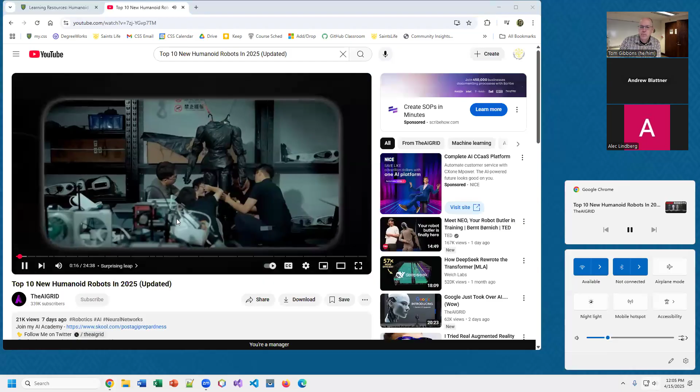Okay, so he's going to go over some robots, and just so you know, what we're going to want you to do eventually is break into pairs. We'll do this today and sign up for a robot. I have a bunch of robots listed here, and I think I have everyone in that video. If I'm missing one, we'll add it to the list. So what we want you to do is pick a robot here and sign up, and again we'll sign you up in pairs when possible. So when you're watching this, think, oh, I want to do a report on that robot. And again, these are only 10, and we have more than 10 on this list, just so you know.

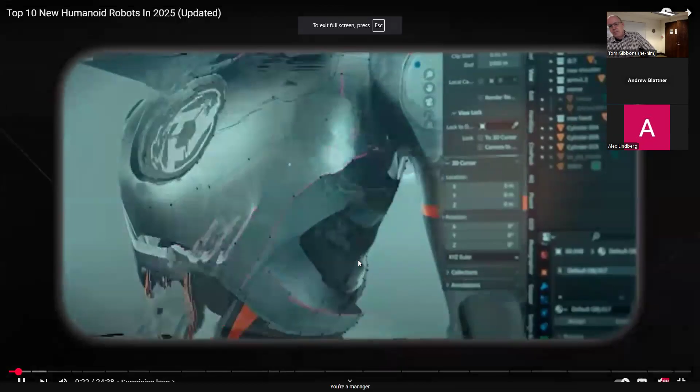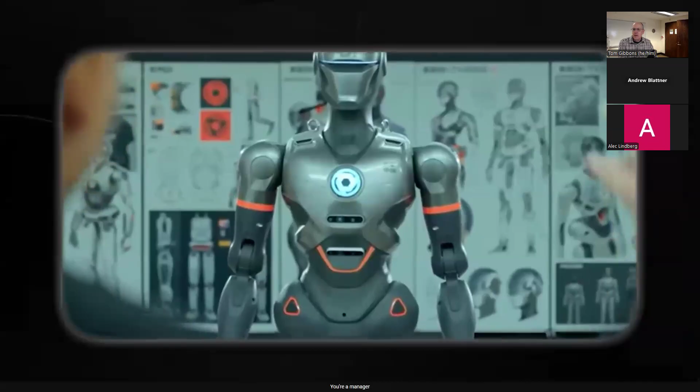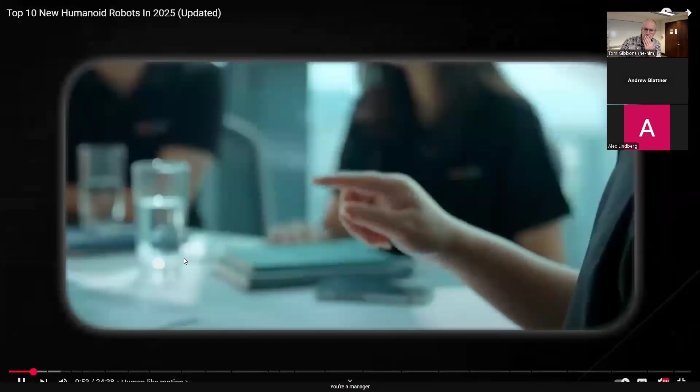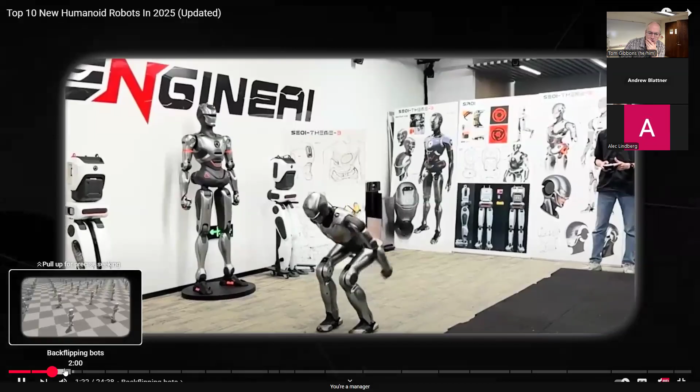2023. The company specializes in developing robots with lifelike movement capabilities, setting a new benchmark for realism and functionality in robotics technology. Among its creations, Engine AI's SE01 humanoid robot stands out for its remarkably human-like gait and advanced motion control, achieved through the use of NVIDIA's Isaac Gym, a virtual environment that enables sophisticated AI training. This platform allows the robot to simulate and refine movements before implementing them in the physical world, resulting in fluid and natural locomotion that closely mimics human behavior. Engine AI's team, composed of 36 researchers from prestigious institutions such as UC, demonstrated impressive feats of agility, including performing front flips, a significant achievement given the difficulty of maintaining balance during such maneuvers. The company offers a diverse product lineup tailored to various applications. The SE01 is designed for industrial use, while the SA01 serves educational purposes, and the PM01 focuses on agile performance. These robots are not only functional, but also open source platforms.

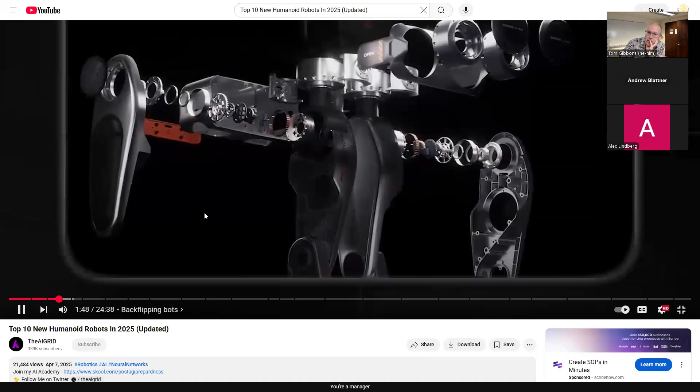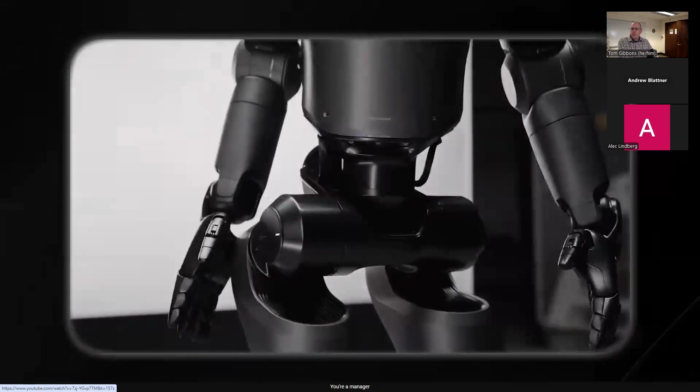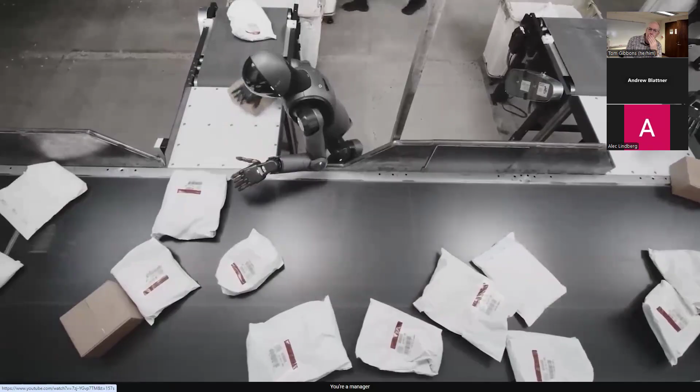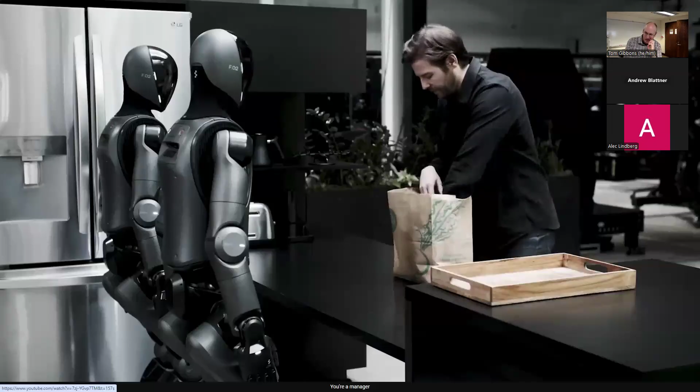Figure robot. Figure 02 is a cutting-edge humanoid robot developed by Figure AI, representing a significant advancement in the field of robotics and artificial intelligence. Standing at 5'6" tall with a payload capacity of 20 kilograms, the Figure 02 is designed to closely mimic human form and function, making it ideal for performing a wide range of tasks in environments built for people. This second-generation humanoid robot boasts impressive features that set it apart from its predecessors and competitors. The Figure 02 is powered by an electric system that allows it to operate for up to 5 hours on a single charge, with a custom battery pack integrated into its torso, providing 50% more energy than its previous iteration. The robot's mobility is enhanced by its ability to move at speeds of up to 1.2 meters per second and navigate complex environments with ease. One of the most striking aspects of the Figure 02 is its advanced AI capability, which enables it to perceive and understand its surroundings, adapt to changing conditions, and even engage in speech-to-speech conversations with humans. The robot's onboard vision language model, powered by 6 RGB cameras, allows for fast, common-sense visual reasoning, while its partnership with OpenAI has led to the development of custom AI models that drive its conversational ability.

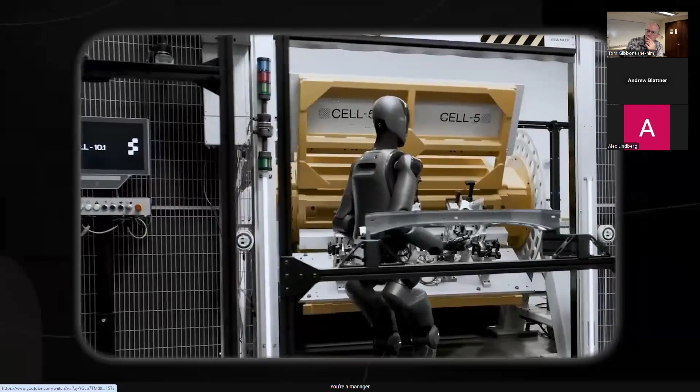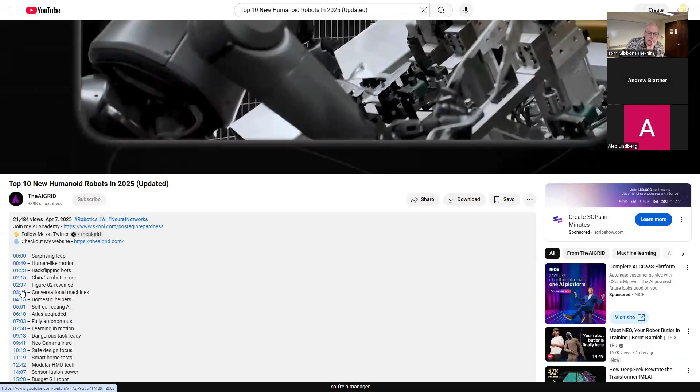The Figure 02's dexterity is another standout feature, with its 4th-generation hands equipped with 16 degrees of freedom per hand, mimicking the strength and agility of human hands. This level of dexterity allows the robot to perform intricate tasks with precision, from manipulating delicate objects to operating tools and machinery. Recent demonstrations of the Figure 02's capabilities have showcased its action.

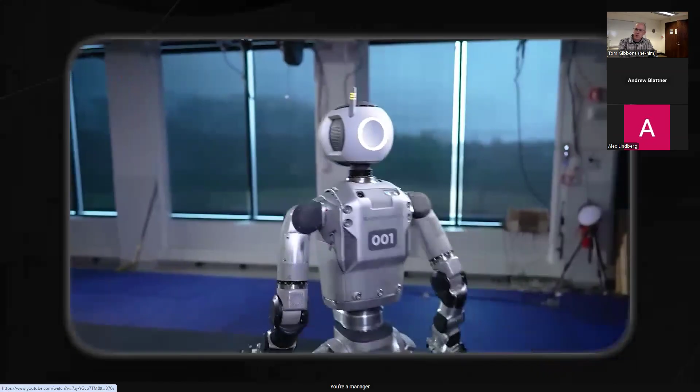Next, let's take a look at the Boston Dynamics Atlas robot. The Boston Dynamics Atlas is a cutting-edge humanoid robot that has become an icon in the robotics industry since its initial unveiling in 2013. Standing at 1.5 meters tall and weighing 89 kilograms, Atlas is designed with an emphasis on advanced mobility, dexterity, and a high strength-to-weight ratio. The robot incorporates titanium and aluminum materials with extensive use of 3D printing technology to optimize its frame for both robustness and relatively low weight.

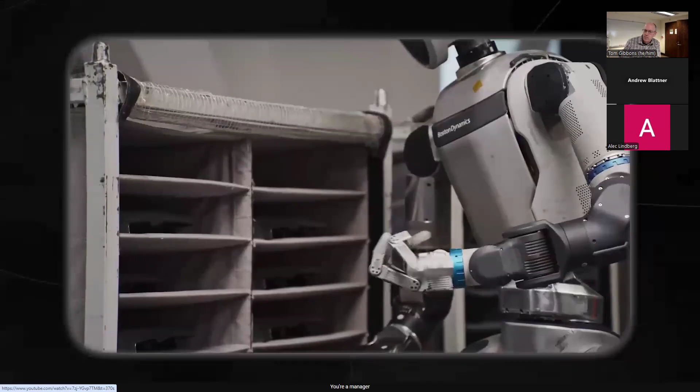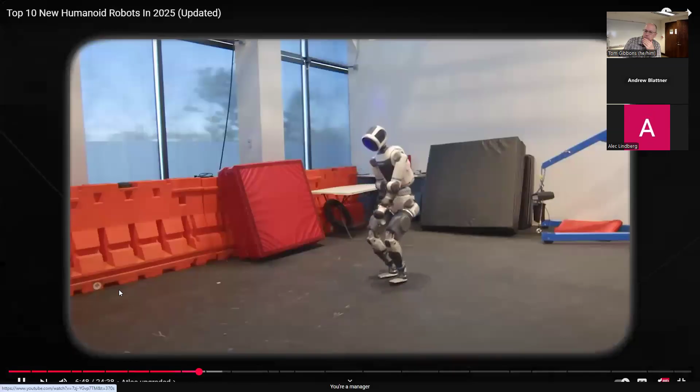What makes Atlas truly remarkable is its impressive agility and physical capability, which have continually evolved over the years. The robot has transitioned from a partially hydraulic machine to a fully electrified robot, marking a significant advancement in its efficiency and flexibility. Atlas is equipped with 28 joints and advanced control algorithms that enable it to execute tasks with high precision while adapting to its environment. Its design allows for 360-degree swiveling capability.

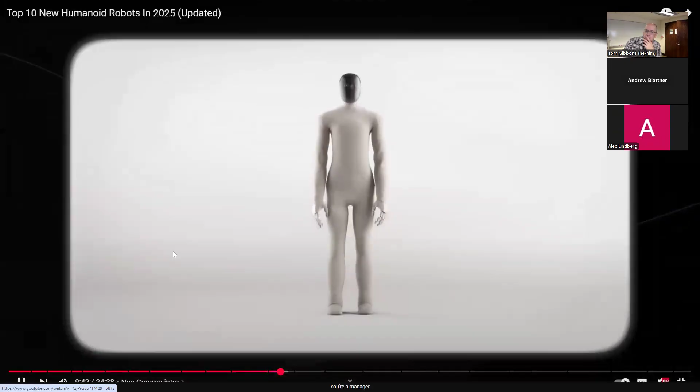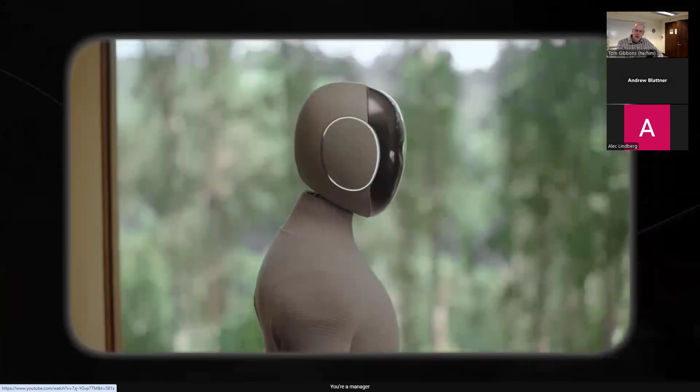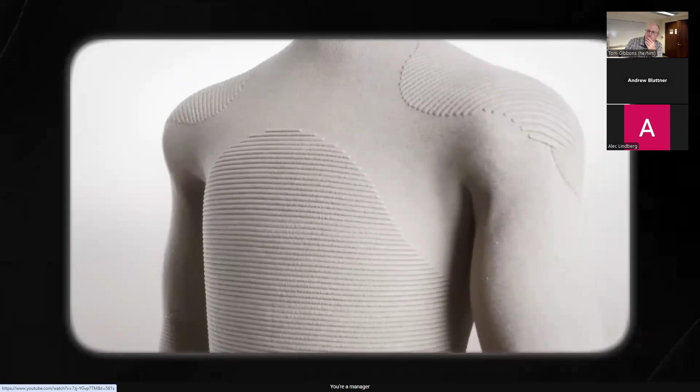NEO Gamma is an advanced humanoid robot developed by a Norwegian company, 1X Technologies, designed specifically as a home assistant capable of performing household chores and interacting naturally with humans. What makes NEO Gamma particularly remarkable is its unique design approach that prioritizes human comfort and home integration. Unlike conventional humanoid robots with rigid mechanical appearances, NEO Gamma features a soft knitted nylon bodysuit created using a Japanese Shima Seiki machine, giving it a more approachable, clothes-like look that helps it blend seamlessly into home environments.

This soft exterior not only makes the robot more aesthetically pleasing, but also serves a practical purpose by preventing it from damage.

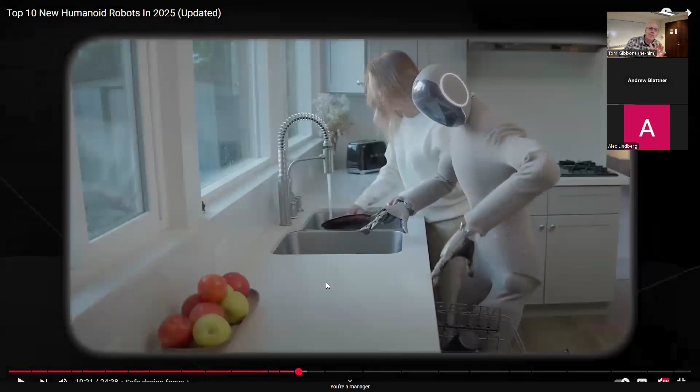What is the biggest problem? Stress from all the things that I have to manage and deal with. Definitely damaging the fragile. So here's one question I have with this whole thing: if I had a robot who knew how to wash dishes and do my dishes, I would not be helping the robot, I don't think. I mean, why are you helping the robot do the dishes? I don't understand that part of it. I would help my spouse do the dishes and visit with her—well, actually, I did the dishes, but that doesn't matter. She could help me do the dishes, that would be fine. But helping a robot, I don't get it. Okay, injuries to the robot.

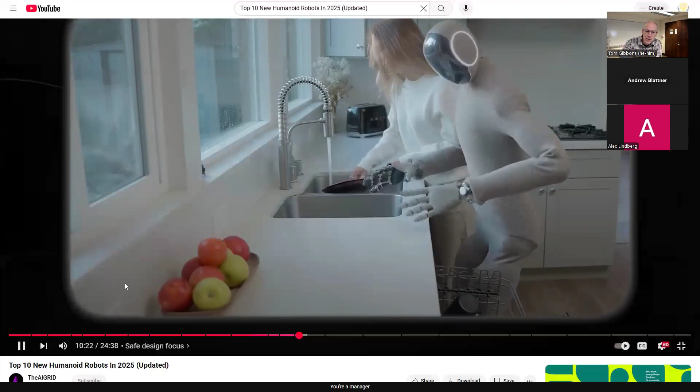The robot features distinctive emotive earrings that light up when it is with the owners and provide visual feedback about the status, enhancing the intuitive interaction experience. NEO Gamma's movement capabilities are impressive. Now let's take a look at another company coming out of London.

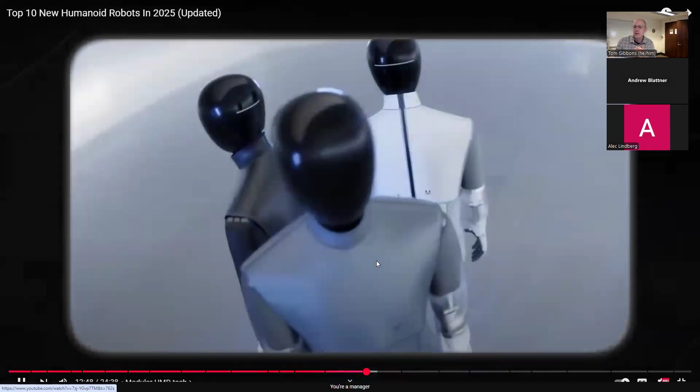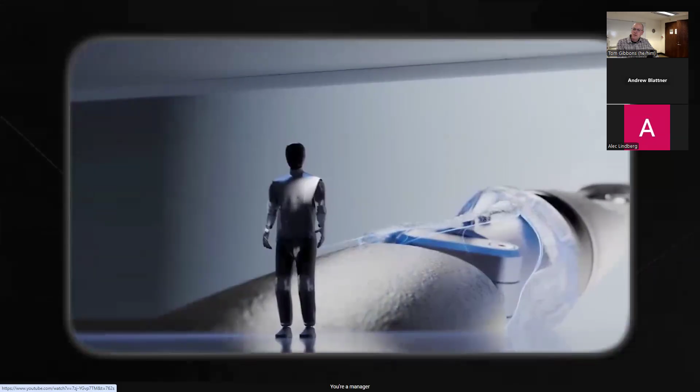The HMND-01 is a next-generation humanoid robot developed by Humanoid, a London-based AI and robotics startup founded in 2024 by serial entrepreneur Artem Sokolov. Standing 175 centimeters tall and weighing 70 kilograms, this general-purpose humanoid robot represents a significant advancement in robotics technology designed to address labor shortages and enhance automation across various industries. The HMND-01 boasts impressive specifications, including a walking speed of 3.3 miles per hour, an average runtime of 4 hours, and a payload capacity of 15 kilograms. What makes this robot particularly exceptional is its modular design concept, allowing customers to incorporate different upper body looks.

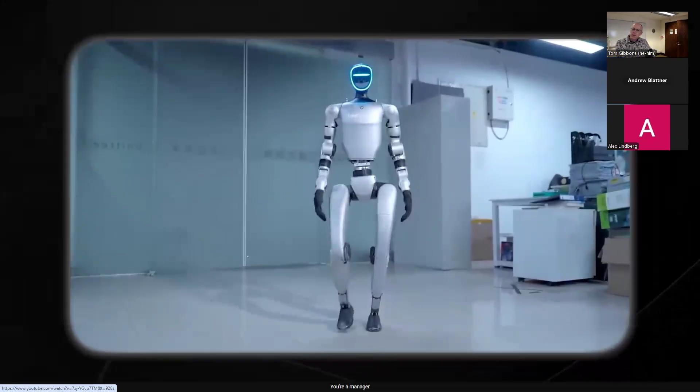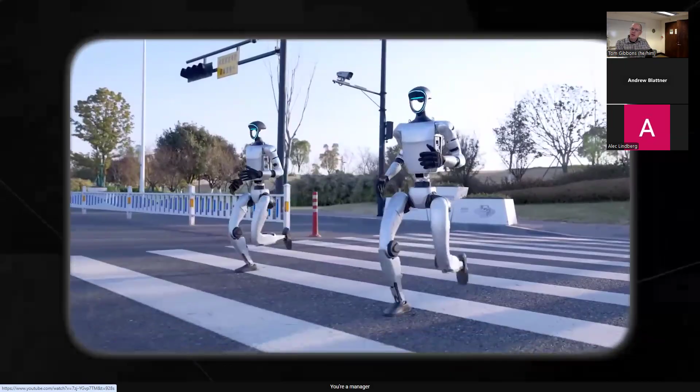Now let's take a look at a robot coming out of China. The Unitree G1 is a groundbreaking humanoid robot that has significantly advanced the field of robotics with its exceptional mobility, dexterity, and affordability. Standing at 1.32 meters tall, weighing approximately 35 kilograms, the G1 was introduced as a mass production version in August 2024 by Chinese company Unitree Robotics. What makes the G1 particularly remarkable is its price point of just $16,000, making it one of the most accessible humanoid robots on the market and positioning it to compete with industry giants like Boston Dynamics and Tesla.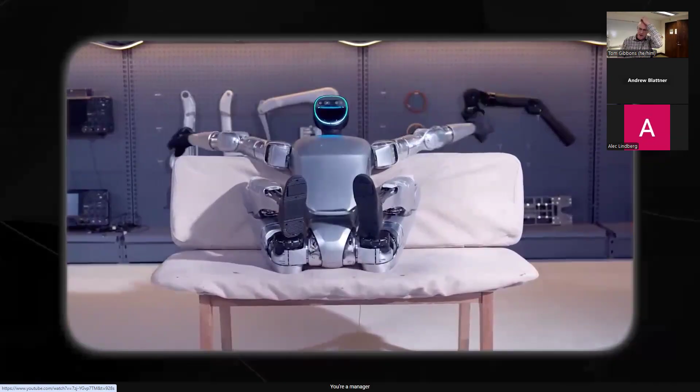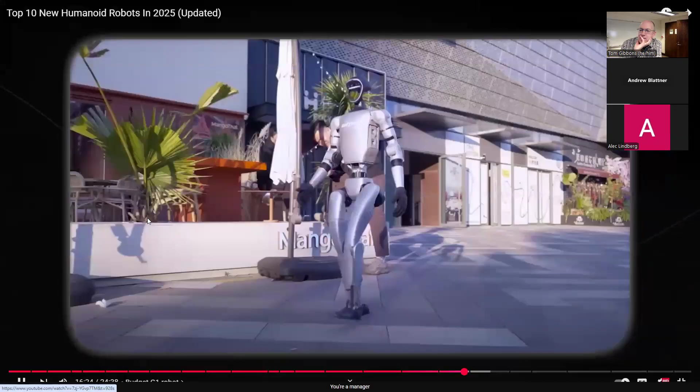The G1's design incorporates 23 degrees of freedom in its joints, with some models featuring up to 43 degrees of freedom, enabling it to perform complex movements with impressive precision. This exceptional joint flexibility allows the robot to execute intricate maneuvers such as jumping, spinning, climbing stairs, and even performing martial arts techniques. The robot is equipped with advanced sensors, including an Intel RealSense D435 depth camera and a Livox MID 360 LiDAR, providing it with 360-degree environmental awareness for precise navigation and obstacle avoidance.

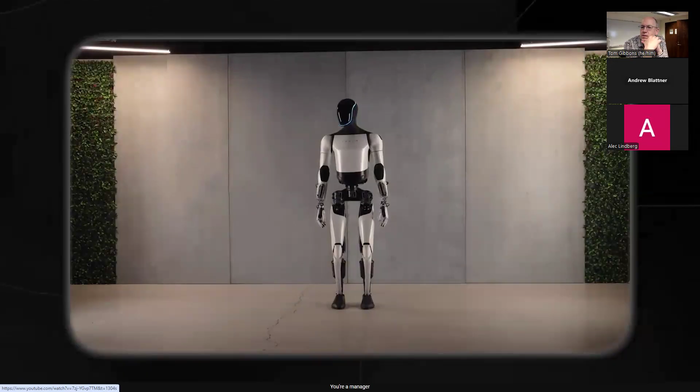Now let's take a look at Elon Musk's humanoid robot. The Tesla bot, also known as Optimus, is a humanoid robot designed by Tesla to perform tasks that are repetitive, dangerous, or undesirable for humans.

Standing at approximately 170 centimeters tall and weighing around 60 to 73 kilograms, it's built to closely resemble human proportions and capability. The robot was first announced at Tesla's AI Day event in August 2021, with Elon Musk describing it as a general-purpose robotic assistant that could eventually become more significant than Tesla's vehicle business.

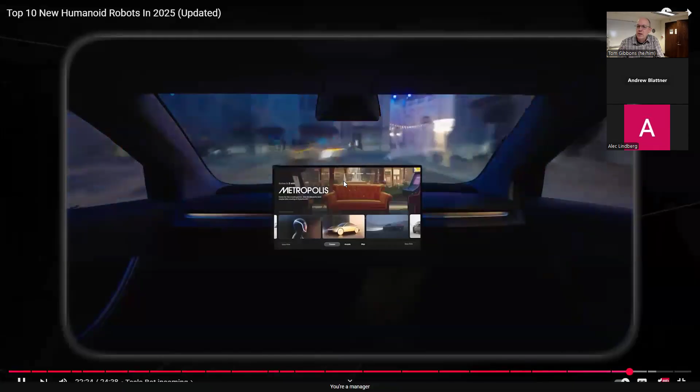What makes the Tesla bot particularly impressive is its integration of Tesla's existing automotive technology. It uses the same AI systems, batteries, power electronics, and advanced motors.

Wanted to just get you the feel of what some of these robots are, in case your social media feed is not full of robots. And if your social media feed isn't full of robots, I think it should be. So, okay, let's go back and look at some of these.

Why do I think robots? Because we've been talking about robots since I was your age, and that's a long time. We've been predicting robots are just around the corner for a long time. So why do I think we are there?

Well, we can see a lot of growth in what we often call physical intelligence. We've seen a lot of growth in how language is processed and even how images are processed. But like this quote from NVIDIA's CEO: the next frontier of AI is physical AI. Imagine a large language model, but instead of processing text, it processes its surroundings.

Instead of taking a question as a prompt, it takes a request. Instead of producing text, it produces action tokens. And again, we'll see this in these models.

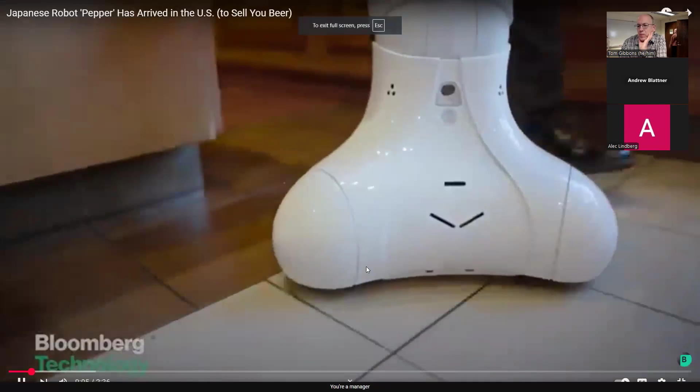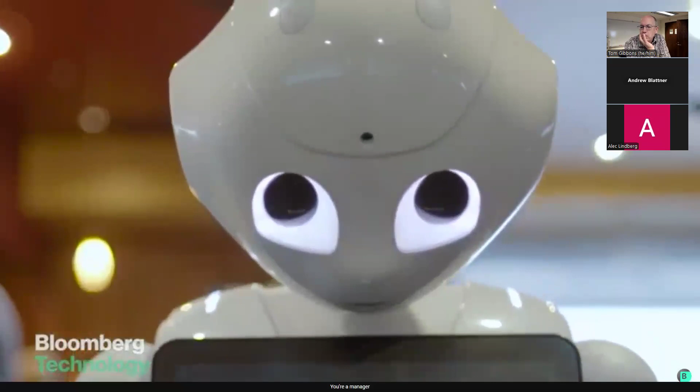So again, this was cutting edge. It was introduced 10 years ago and still pretty cutting edge 5 years ago before the pandemic.

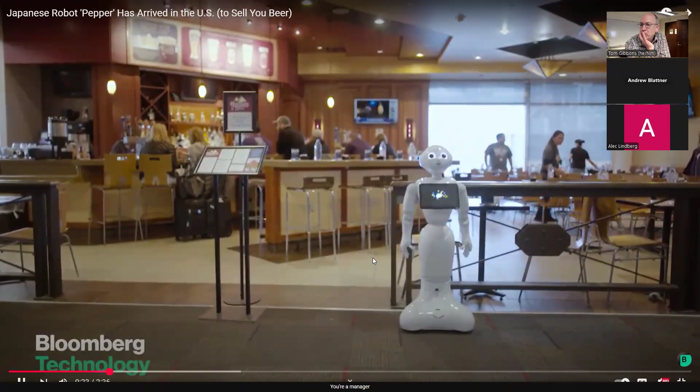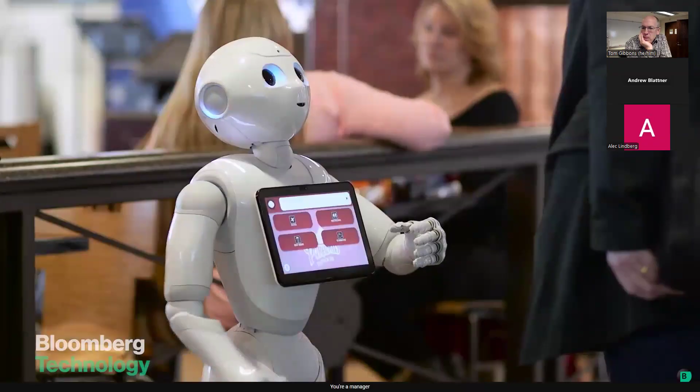Okay, so that's Pepper again, and they're still used in research out there, but to me they seem very outdated given the current technology. No feet, can't go upstairs. Basically, it can move wherever your vacuum can move. So, okay, what's underneath this that I think is important here?

One thing I want to talk about is foundational models. You remember when we did convolutional neural networks and image recognition, like trying to detect whales or cancer? We could build them from scratch, but what we really found powerful was these pre-trained networks. They would take a big convolutional neural network and train it on a whole bunch of images and get a whole bunch of the filters pre-trained. So we had things like MobileNet or VGG16. They were all pre-trained, and then we could just modify those pre-trained models and get going very fast.

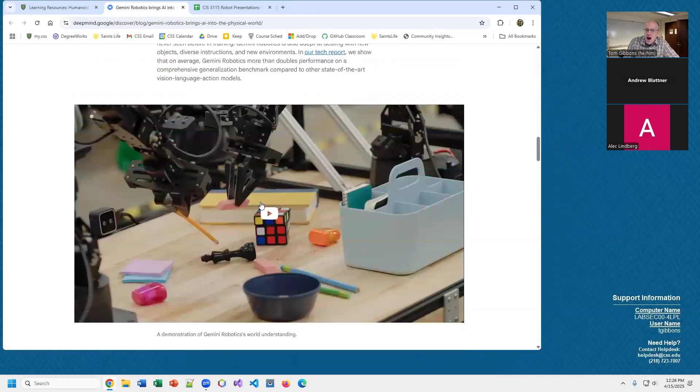So there's a couple that are out there. Google has their Gemini robotics platform. This is their second iteration of it, and they've been training it on a lot of these actions. So it sees, you can talk to it, and it can move around. Let me just look at a couple of these videos.

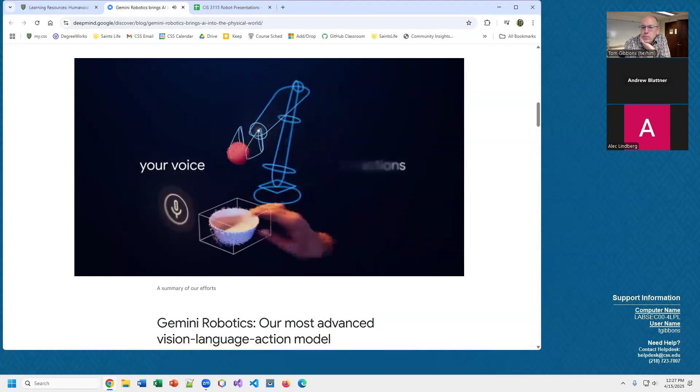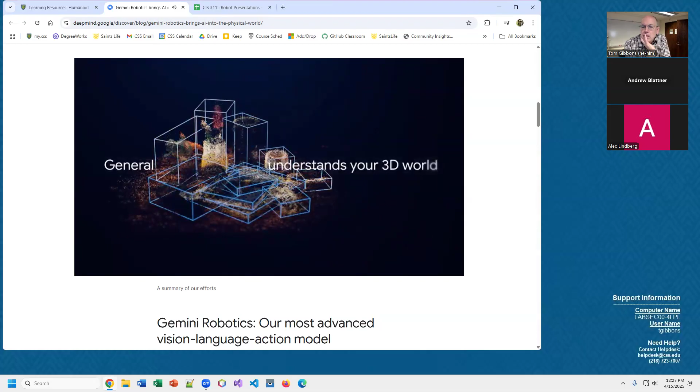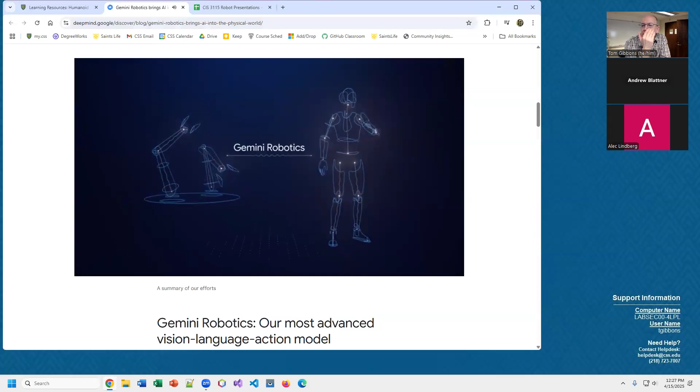We're bringing Gemini 2.0's intelligence to general purpose robotic agents in the physical world. To be helpful, robots need to be interactive, responding live to your actions and your voice. They need to be dexterous to complete your most complex tasks, and they need to be general to understand things in your 3D world. And all of these capabilities need to work across different physical forms. We're bringing this together in Gemini Robotics, our most advanced vision language action model.

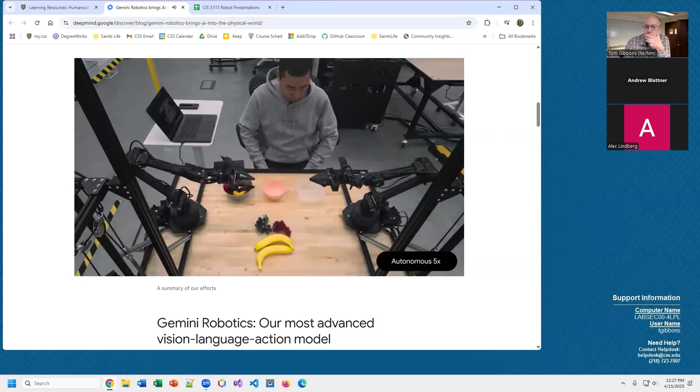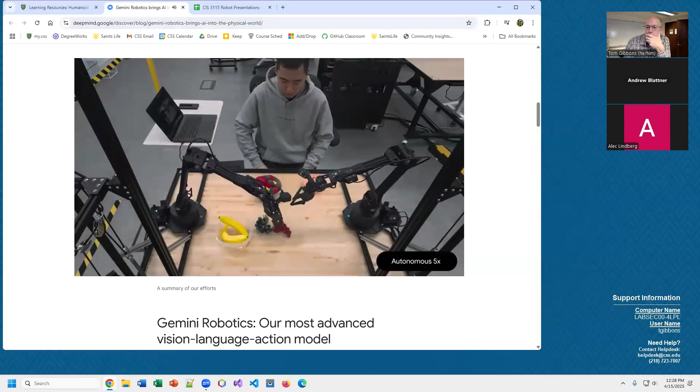Gemini Robotics is interactive. And you put the banana in the clear container. Notice how we move the objects and the model reacts and replans on the fly. And you put the grapes in the clear container. Our model's low latency means it can respond live to rapidly changing conditions and instructions. This same model can generalize to all kinds of applications where you can collaborate with the robot live.

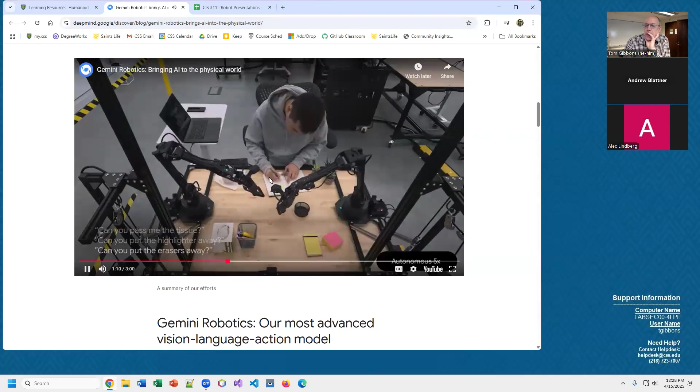Gemini Robotics is dexterous. High dexterity tasks are some of the biggest challenges.

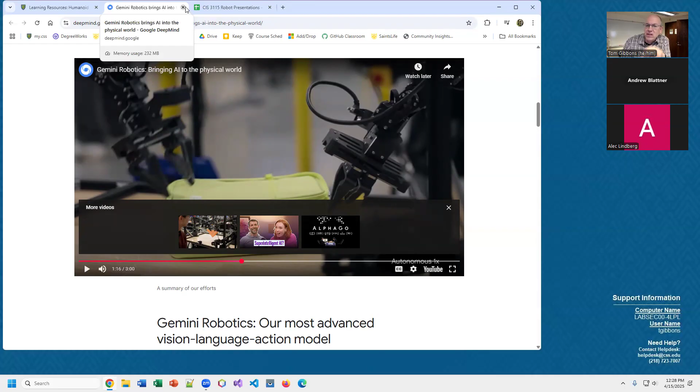So places like Google are working on these foundational models here and training them. And again, they're set up to work on different physical environments. Like this is just two gripper arms, and it's expandable. So again, you can take this model and move it to a humanoid robot or something like that, and you don't have to retrain everything for that. So that's what we're seeing with this kind of idea with these robots.

And they should understand language. You should be able to talk to them and work with them.

Putting the pen with the other pencil.

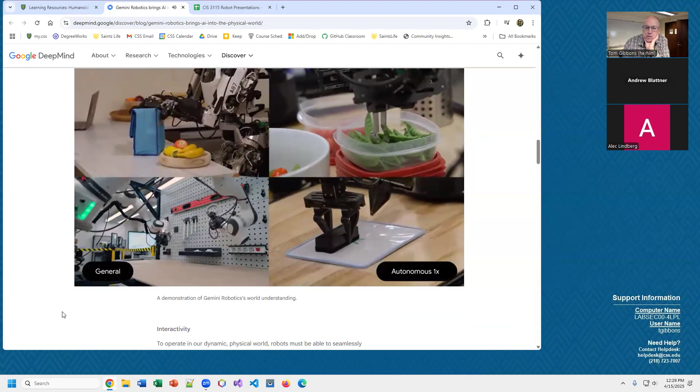And so again, they're supposed to be generalized. I have Alexa's at home, my wife uses Apple and Siri some, and I use Google on my phone. And they're getting better, but they still don't generalize well, they don't answer questions well, they're still very primitive. And so we're beginning to see them integrated with large language models, and we see the same thing with traditional robots.

We were trying to program a robot just to drive around the hallways at St. Scholastica here. We couldn't just tell it where offices were. We had to figure out, for every office, 20 different phrases with exact wordings—go to Sabah's office, visit Sabah's office, can you visit Professor Alwan's office—all these different ways you could say this, and program it all in there. It was very specific, very hard to do, where these new models are much more general.

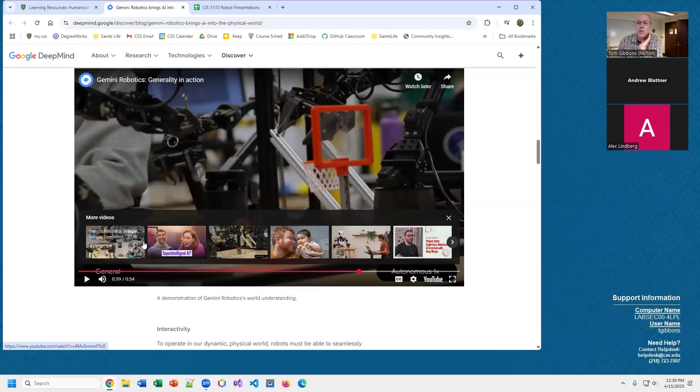So again, Google's doing that. Figure AI is also doing this. Figure AI is largely funded by OpenAI here, so they have their Helix model for this. Let's just see if we can watch this.

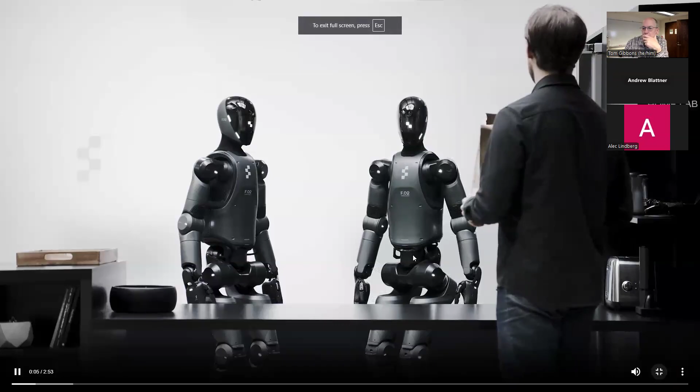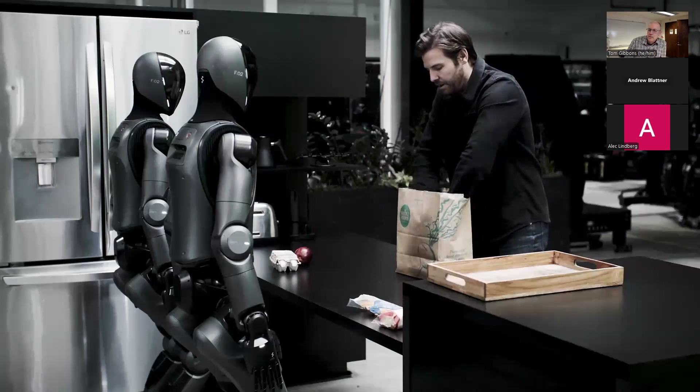Very first time that you've ever seen these items, I'd like you to use your new Helix AI and try to reason through where you think they belong, and then work together to put them away. Does that sound good?

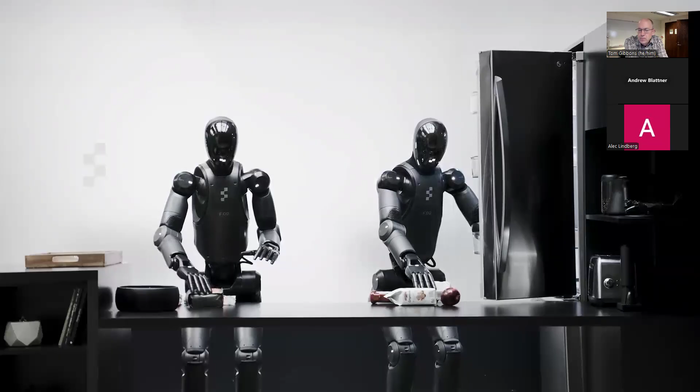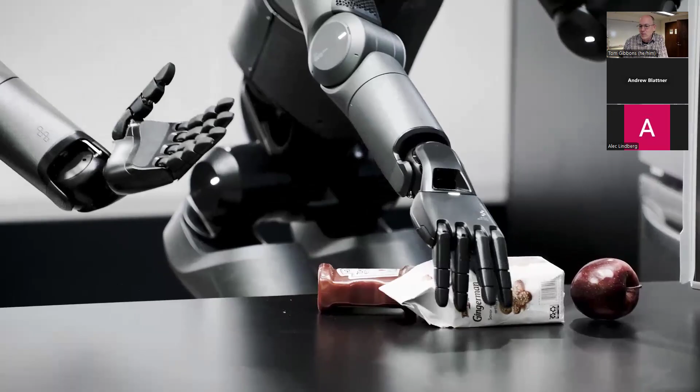It used to be all the videos for robots were always sped up 2 to 10 times because the robots were so incredibly slow that you couldn't watch them otherwise. I always remember an episode of The Big Bang Theory where they're trying to program the robot, and it takes them like 10 minutes to pick up a bag of chips and move it over there. That's what it was like watching real time, actual not sped up videos of robots—it would just drive you crazy how slow they were. Where now these often aren't sped up. They seem slow to you probably because you're used to watching all the videos sped up, but the fact that these aren't sped up is pretty impressive here.

Again, so they're building this large scale generalized model here, this Helix system for people to use.

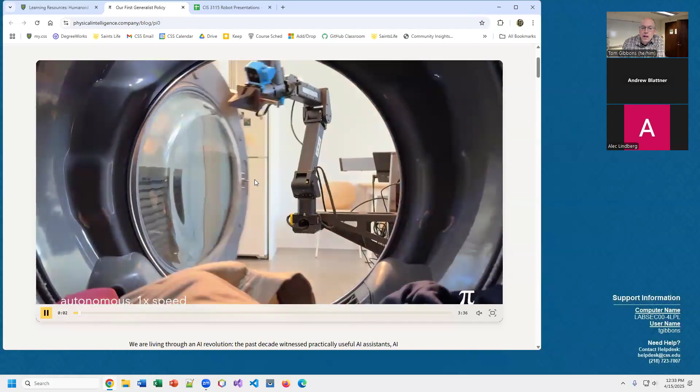So those are these vision, language, action models. There's also just more generic robotics foundation models. Covariant is a startup that released a version of it here, and then Pi Zero released a version recently, with their version and testing these models out and doing things.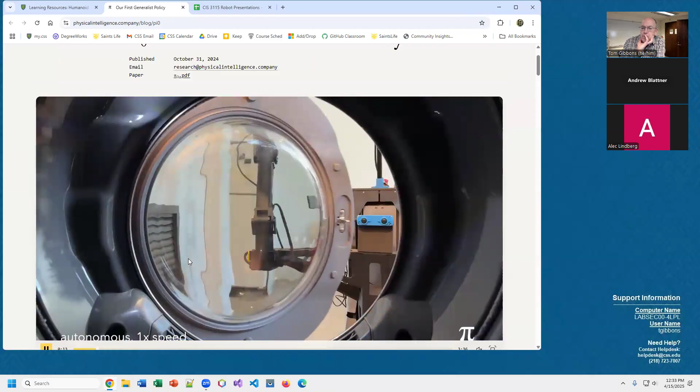They're trying to test out lots of different things and train these models on lots of different examples, lots of different tasks, lots of different visions, and different types of robot configurations for this.

I don't know if you've heard about Groot that was just released in March by NVIDIA. So let's just watch Groot.

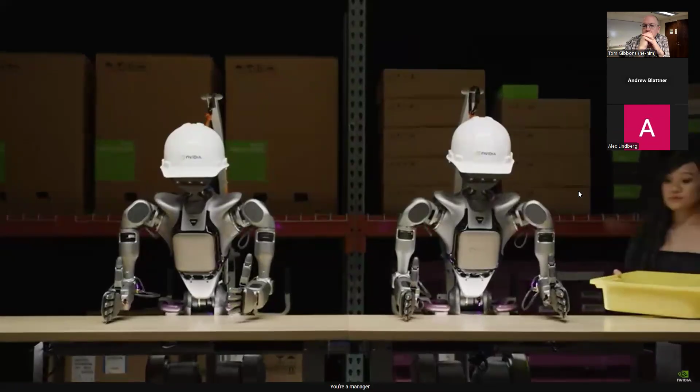Isaac GR00T is a platform of sim-ready data, simulation frameworks, synthetic data generation blueprints, and pre-trained models. NVIDIA Isaac GR00T N1 is an open generalist foundation model for humanoid robots. Groot N1 features a dual system architecture for thinking fast and slow.

You can see this, and hopefully you can tie analogies to what we've seen with large language models, where we take language and convert it into tokens, we encode it into tokens. But they're also taking sensor data and converting that into tokens.

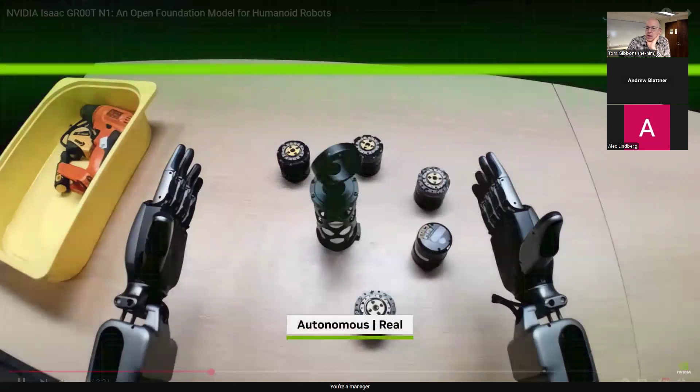Inspired by principles of human cognitive processing, the slow thinking system lets the robot perceive and reason about its environment and instructions, and plan the right actions to take. The fast thinking system translates the plan into precise and continuous robot actions.

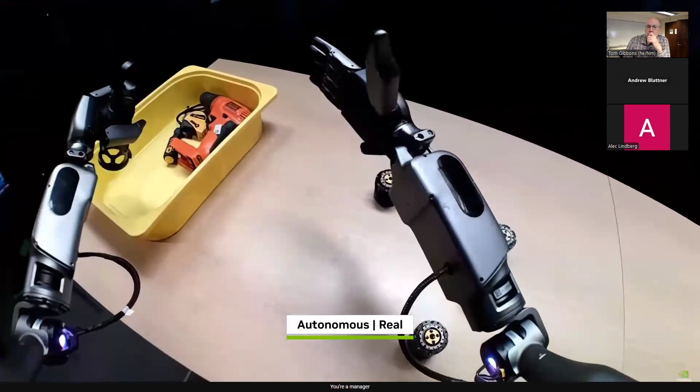While internet scale training data provides common sense and reasoning, it doesn't teach robots specific actions or control. So we need better data and more of it. Human demonstration data is limited by the number of hours in a day. With Groot blueprints for synthetic data generation built on NVIDIA Omniverse and Cosmos, we can exponentially multiply a small number of real-world data captures into a massive, diverse training set.

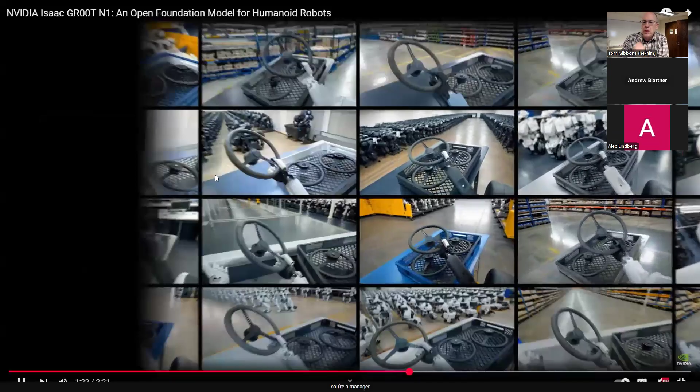We didn't talk about this too much when we did vision stuff, but in vision systems there are ways you can take your images—say you only have 1,000 images—and program them to skew, rotate, or move each image just a little bit so they're not all identical, and that helps generalize. We've been able to do this a lot with images, and now they're talking about how we can do this with these more complex systems.

Groot N1's generalization lets robots manipulate common objects with ease and execute multi-step sequences collaboratively, and even across multiple embodiments.

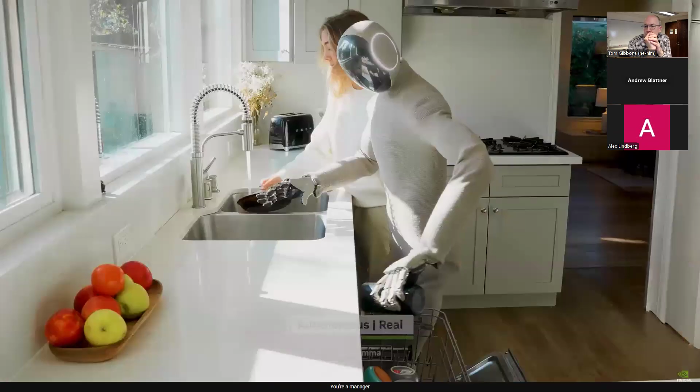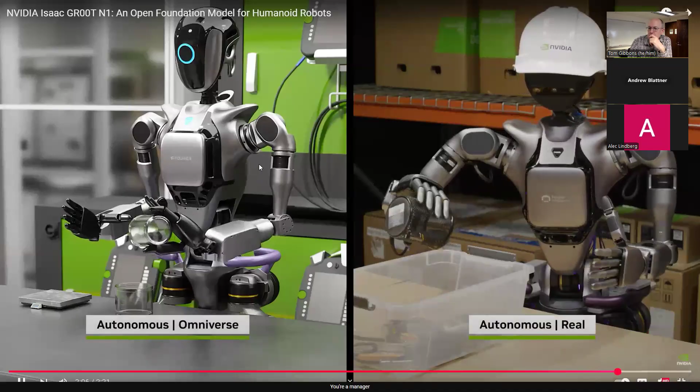With synthetic data generation and reinforcement learning, humanoid robot developers can post-train Groot N1 for their specific robot and task. The age of generalist robots is here, driven by developers building.

Okay, so again, they're talking about a lot of this where we're training not just in real life, but also basically in a video game, in a simulated world.

You'll hear this mirror idea where you can take your robot, mirror it in a simulated world, and train it in that. That's basically pulling a lot of what we know from game design, because in game design we've had physics engines for a long time. NVIDIA, for example, knows a lot about running physics engines and how you can set up these models to run in there.